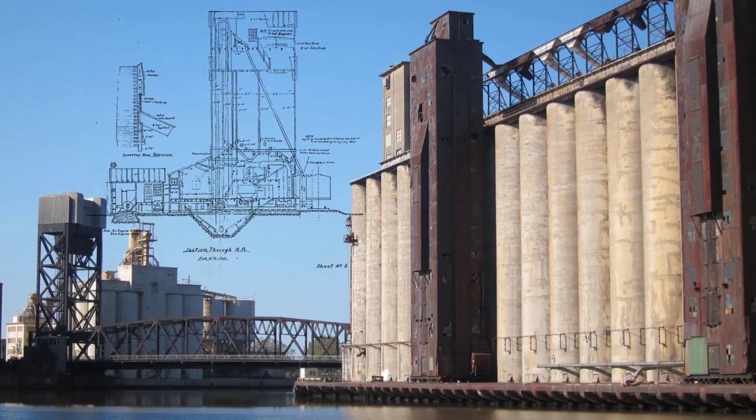In his book, Towards New Architecture, Le Corbusier describes the deteriorating state of architecture versus the rise of the engineers during the industrial boom of the early 20th century. He explains that engineers rely on the laws of nature and mathematical forms to build their factories and machineries. The factories built by the engineers at the time are a better form of architecture than the houses and towns designed by the architects.

Architecture is heavily influenced by styles and customs, limiting the true role of architecture in the city and society. Styles are sometimes, but not always, pretty and never anything more. However, architecture has higher ends, and it should impress the human instincts. The architect should be able to arouse emotions, leading to a satisfactory condition for the people exploring his architecture.

The genius of Le Corbusier was his ability to join his Cubist art philosophies with his mathematical analytical mind. So to solve the issue of the architects, he wrote about the three reminders that architects should come back to: mass, surface, and the plan.

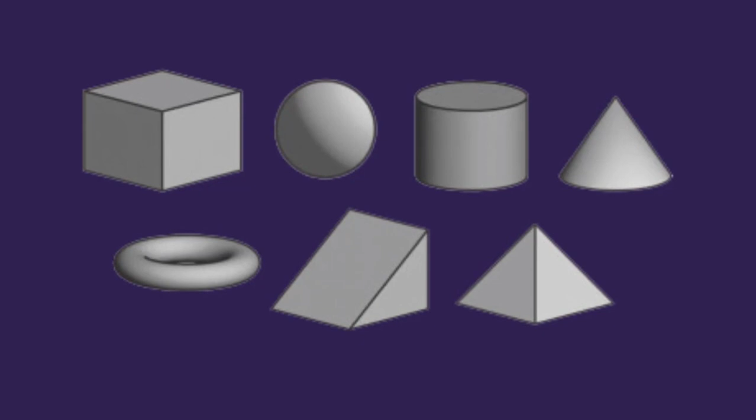First, architecture is a masterful play of masses that we see in light. Le Corbusier argued that the primary forms are the forms that our brains mostly appreciate. Egyptian, Greek, and Roman architecture is based on prisms, cubes, cylinders, pyramids, and spheres. On the other hand, Gothic architecture is made from complex forms. And when a form gets too complex, it will require additional decoration, such as the use of ornaments and foliage, which will downgrade the purity of the mass and the design of the architect. The job of the architect is to preserve the purity of the geometry in his projects.

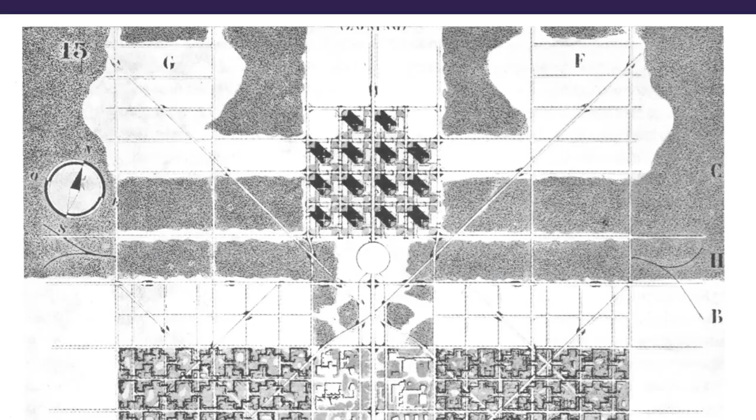You can check out the architectural works of Raphael and Bramante to clearly understand the use of pure geometrical shapes in buildings. The final reminder is the use of the plan.

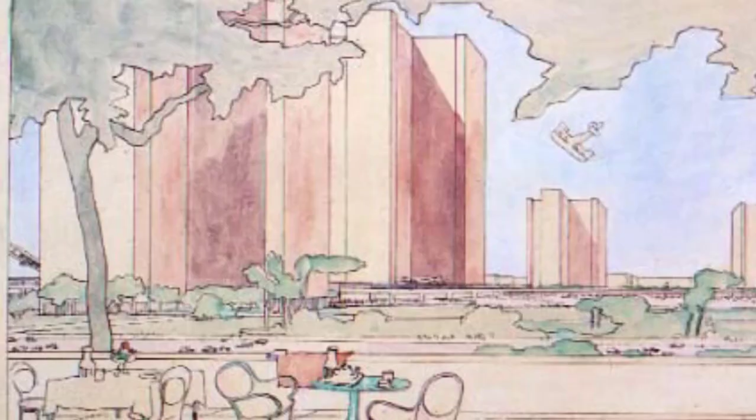The plan is the generator of architecture and the element that requires the best of the architect's imagination. Let us use an example that Le Corbusier described in his book to clearly understand the importance of the plan in modern architecture. If you are in a city where the buildings are made out of pure masses, the grouping of these masses is positioned in a clear rhythm, and the relationship of these masses to the space is in the right proportion, then your eye will transmit to your brain the sensation of the scenery, and your brain will derive from this sensation a feeling of satisfaction of a higher order. The job of the plan is to coordinate the play of masses in rhythmic fashion, invoking the brains of the people, and this is the real role of architecture.

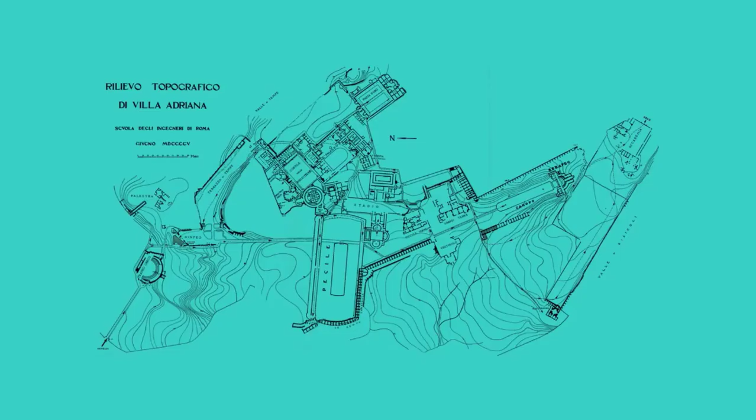After that period came the conquering of Greece, and it brought with it the Greek appreciation of simple forms and mathematical harmony. Briefly after that, some beautiful structures started to rise outside the city where they had more space to work with. One of these structures are Hadrian's Villas.

Throughout the villas, the Romans showed their understanding for the architecture fundamentals of arrangement. Unfortunately, arrangement is one of many foundations for architecture and is not enough to create emotional, moving architecture, so Le Corbusier did not consider the villas a success from an architecture standpoint.

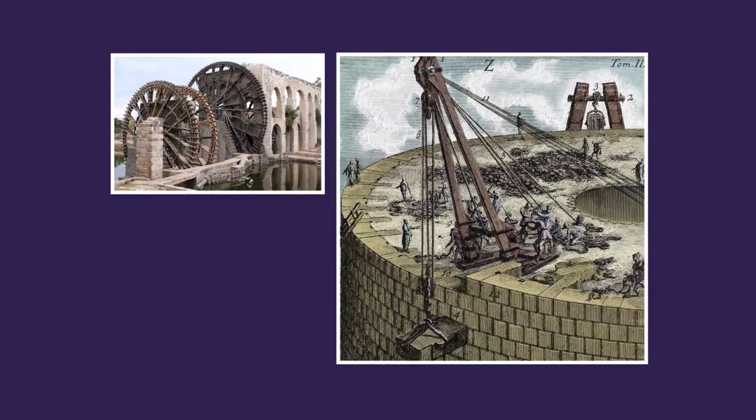Soon afterwards, the Roman engineers started inventing new methods of construction, and with it did impressive things. By combining their intentions, clear aim, and classifications, they built immense cupolas held by Roman cement, and they proved that they are great builders.

The Roman mindset was changing, their legislation and strategies. And since architecture is a byproduct of these factors, new impressive buildings started to pop up. Buildings with the pure shapes that he surely appreciated: the Pantheon, the Colosseum, the Aqueduct, the Basilica of Constantine, and the Baths of Caracalla.

The architecture of the Roman Empire was different from ancient Rome. It was clear and focused, with a single idea and without verbosity. One can argue that we owe the Roman creativity the creation of brick, cement, and travertine.

Fast forward some centuries later, Rome fell under the Byzantium Empire, and back into the horror of styles, gilded palaces, and ornamented architecture. But at that period, the Greek managed to offer Rome another gift of architecture, the Church of Santa Maria in Cosmedin. He saw in this church all what he aspired for as a modern architect, from its pure geometry, simple use of materials, and its sense of relationship.

You can sense in his writings that Le Corbusier was somehow enjoying the mocking aspect of this beautiful church, standing proud and simple in the city of the noble Romans with their ornamented palaces.

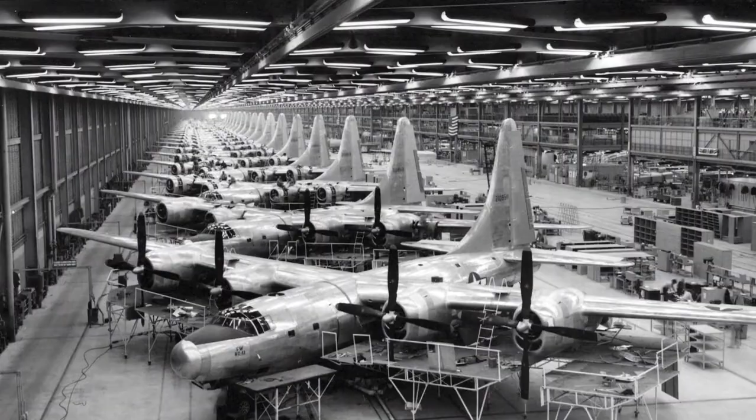During the 19th and 20th century revolutions, by this definition, were all over the place. Le Corbusier was in a constant quest to eradicate the architecture of the past. His mission was to replace the architecture of styles with the new social order that the industrial advancements had brought.

Before we dig deeper into the ideas he presented in this section of his book, it is important to keep in mind that he was a man that loved order and was encircled with controversy. If you want to learn more about this, you can look up his plans to destroy El Raval in Barcelona, or his master plan for the city of Addis Ababa after it fell in the hands of the fascists.

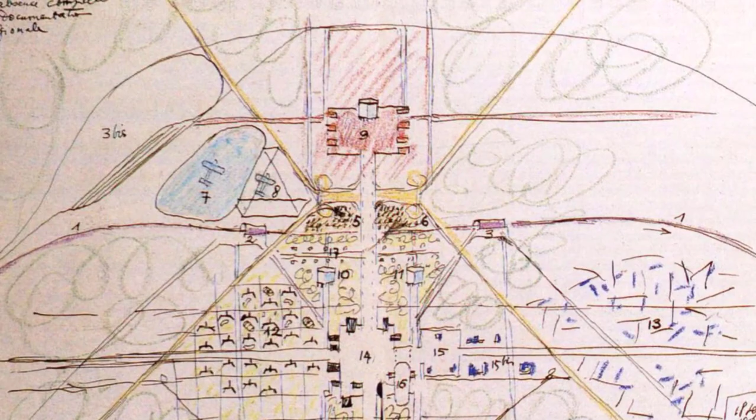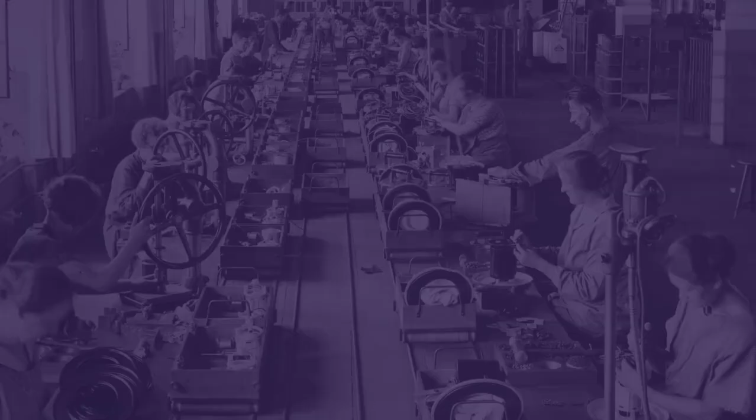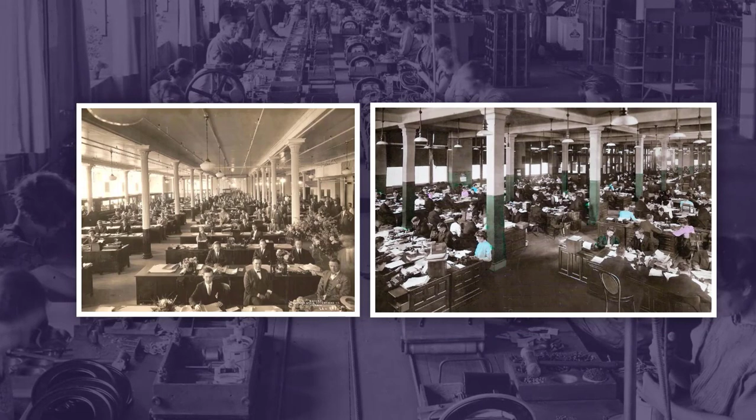The industrial progress was blazingly fast at that period. Productive workspaces in the factories, the offices, and the banks brought a new sense of efficiency and quality to the life of the workers. He claimed that societies from 4,000 years ago up until the 18th century had a simple, stable structure for most of the time.

The man of the past was in control of the tools that automatically met the needs of the society. And because of that, the evolution of societies was slow.

He rose with the sun, slept at dusk, worked in a small booth with his family around him. Like snails in a home made exactly to his measure, there was nothing to induce him to modify the state of things. Work was organized under the family unit.

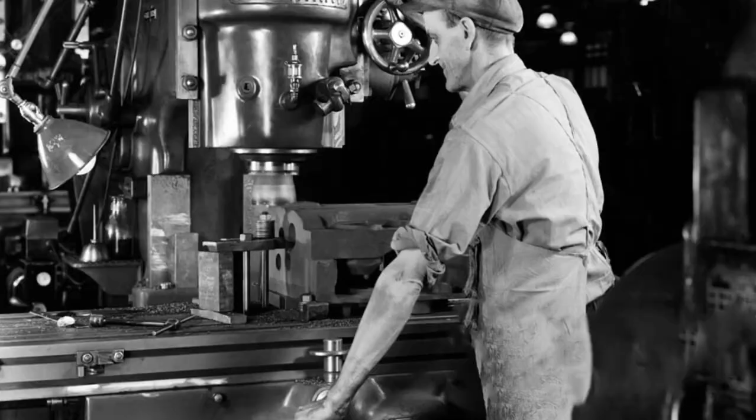The man of today, on the other hand, is living in a world of mass production, cars, and airplanes. Each person is tied to his machine. The spirit of the working family unit no longer exists.

For years, the worker will do repetitive small tasks under the supervision of a strange foreman. In order to feel pride, workers need to understand the collective value of their work, since they don't see the finished product as it moves in assembly lines.

On the other side of the coin, his home, town, and cities are still following the past. The houses lacked good lighting, water, and air quality. Buildings are stacked together in mid-century rows. Man is using machines to create pure work of engineering to advance the quality of life, while the machine he lives in is in need of replacement.

Le Corbusier believed that new advancements changed the population's mindset. Mass production created mass desires—desire for luxury and the relaxation of their minds and bodies after long working hours during the day. Since workers are not able to fulfill their desires while living in the houses of the past, they will not pursue their instinct to form families. Due to that, the family will be killed, and that in turn will destroy society.

So if legislators do not allow the city to move into the modern era, surely there will be a revolution, and it is only avoided with architecture.

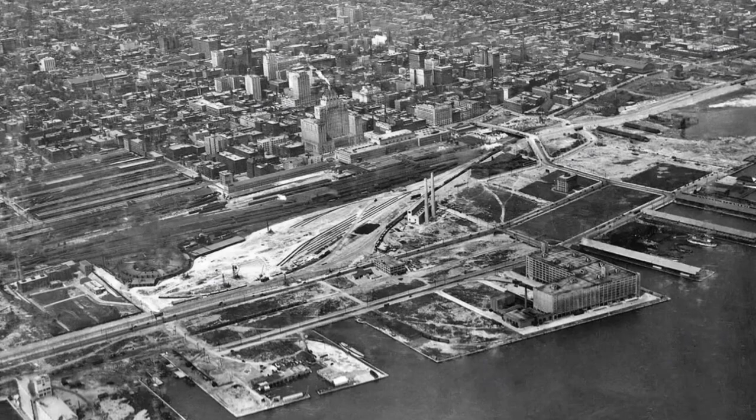In the 1920s, a habitation law passed by the war-devastated France's government required building around 500,000 homes. The law stated that these dwellings should be built well and on a low budget. Le Corbusier believed in introducing mass production strategies already perfected by the industrial sector as the proper answer to this crisis. In our previous video on architecture and revolution, we discussed his idea of man's specialization and humanity's attachment to the machine. That coordination between man and machine was not introduced to the housing sector until after the end of World War I.

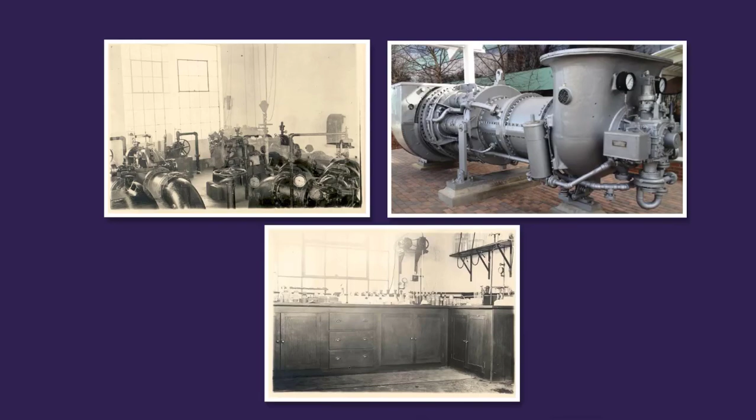Industrialization was already the main driver for most of the trades included in making houses. Advancements already started in water supply, lighting services, and central heating technologies. The housing structure, on the other hand, was still a thing of the past. Stones were drawn on heavy horses carried toward a yard. A mass of human labor unloaded them onto the scaffolding, placing them in position, making lengthy adjustments to each face, taking years to build. If the proper tools were used, houses could be built in a few months.

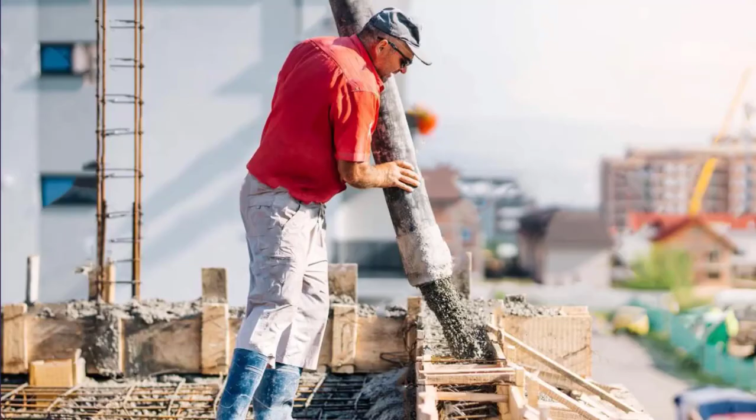Le Corbusier, in this chapter, hinted at what would later be known as his 5 points of architecture. At the time of this writing, Villa Savoye was not yet built, but he mentioned the new discovery of building houses in molds by pouring in liquid concrete from above, like filling a bottle. Le Corbusier was hoping that society would dump the building-to-measure system that dominated the past thousands of years, and that the decent house would no longer be a status symbol of the rich only.

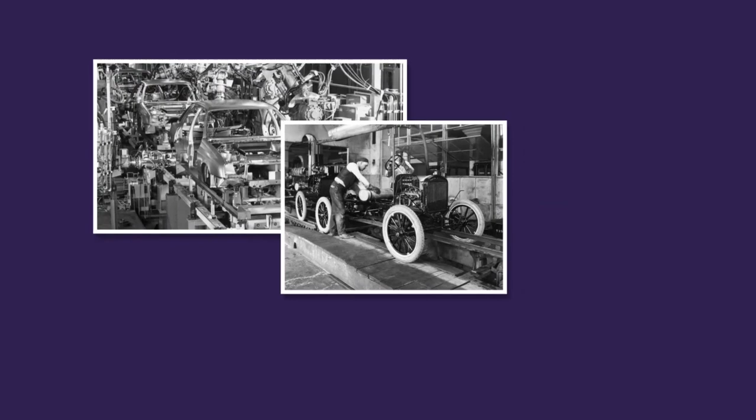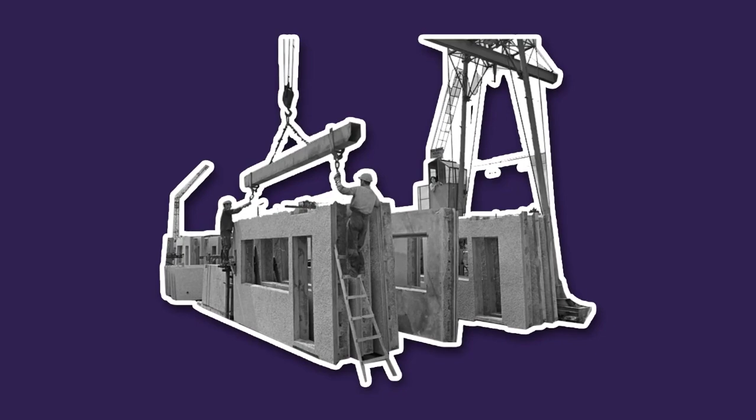The mass-produced house is a tool that should be accessible by everyone. His vision was interconnected: the simplicity of the assembly lines that the car and airplane industries took advantage of to create beautiful machines is also possible in the construction of our homes. The only thing in the way of having the same systems in the making of the dwelling is the right state of mind, as he called it—the state of mind of people to accept living in mass-produced homes.

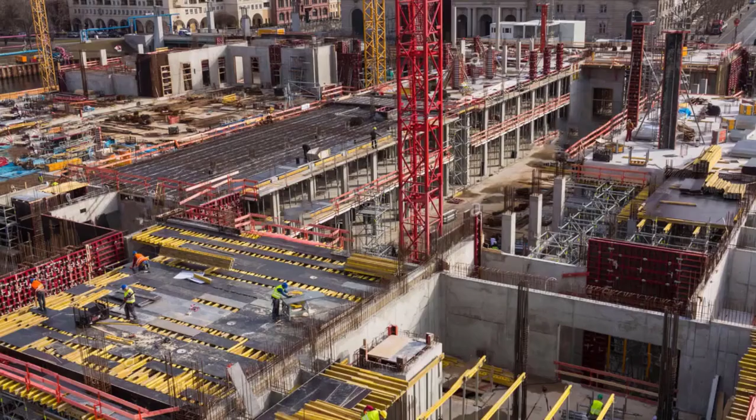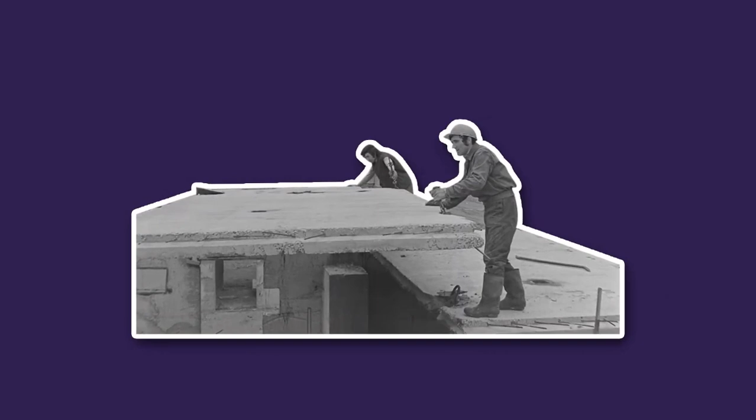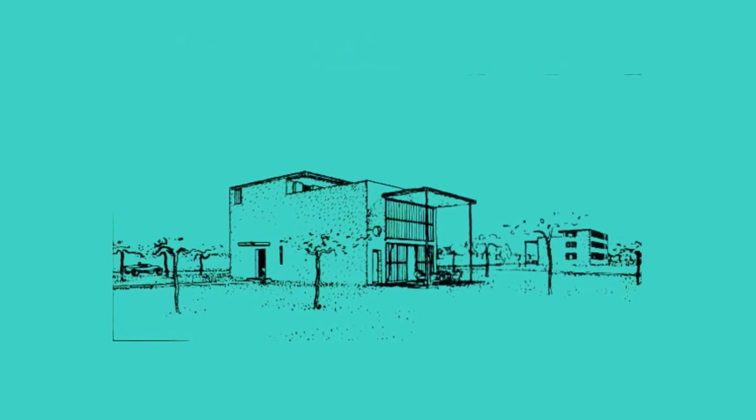To accept the modular system of building that respects modern human needs. What is a mass-produced home? It is the ideal system of building we use, or at least try to reach nowadays. It is the framework of reinforced concrete, cavity walls, doors, windows, all built to a standard unit of dimension. It is the ability to break down house construction into smaller parts, each assigned to a specialist. The buildings themselves can be repetitive modules, laid out in a well-devised plan. The plan can bring a beautiful aspect to simple forms, while the simplicity of the structures guarantees cost effectiveness. Contrary to common belief, the 5 points of architecture are not part of this book.

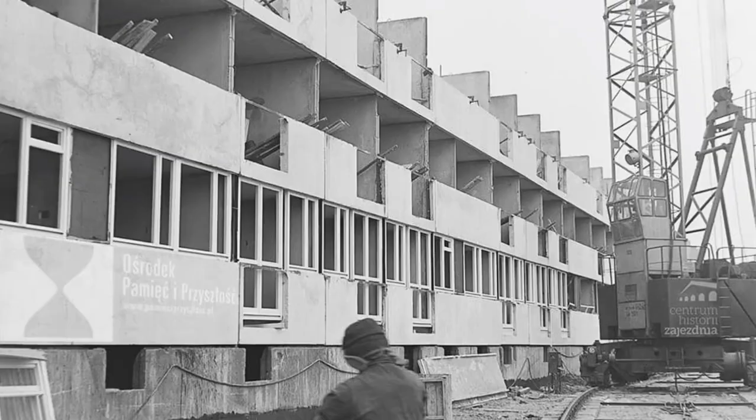However, the chapter on mass-producing housing in this book did lay out the foundations for this manifesto. So it is only common sense to have a brief explanation of these points, since they embody the modern construction techniques that led to the development of modern cities.

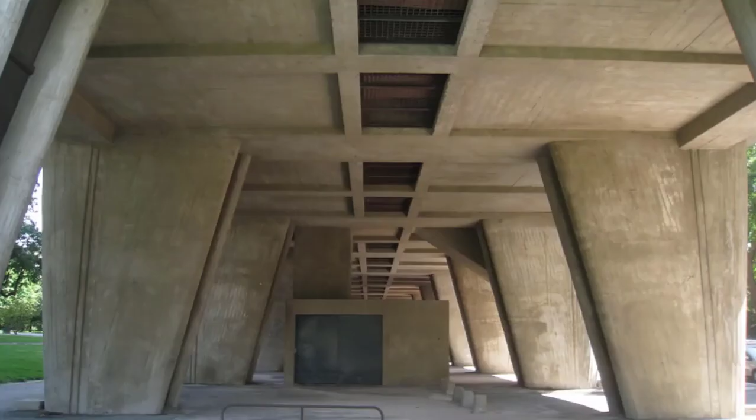We start with the columns, which are the replacement of the supporting walls, laid out in a grid of reinforced concrete—they bear the structural load of the building. The second point is the free design of the ground plan and the absence of supporting walls, meaning the house is unrestrained in its internal use.

The third point is the free design of the facade. By separating the exterior of the building from its structural function, the facade is free from structural constraints. The horizontal windows cut the facade along its entire length and light the room equally. And finally, gardens on a flat roof can serve a domestic purpose while providing essential protection to the concrete roof.

As much as you might disagree with Le Corbusier's philosophies, you might detest modern architecture and his unsuccessful attempts to conform humanity to the orders of the industrial age. But by simply having a look around, you can't deny his impact on our cities and the development of the machines we live in. This is the last video for this book, but surely we will have more to say about Le Corbusier. This book was one of his first works of literature on architecture, but we still have many things to uncover about this controversial architect.